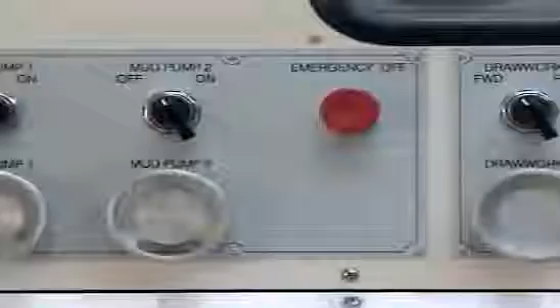As most of these problems can be simulated on the ADC Well Control Training Simulator, this movie is an effort to explain the possible complications, to recognize the indications, and take the appropriate actions in a timely and efficient manner. Welcome to the ADC Simulator, where we make the effort to simulate well control situations which occur on the rig as realistically as possible. In the following few minutes, you will see an enactment of a well control operation and the complications that might arise during this operation.

Hello, boss. Hello, driller. How are you? Fine, thank you. Hope you had a good rest. Yeah, I'm excellent, in good shape.

Very good. So today we'll be drilling. Okay. And while drilling, these are the parameters you have to keep. Weight on bit will be 25 to 30,000 pounds. RPM 120. SPM will be 70. So before you start, driller, make sure all your lineup is okay, on the rig floor and also on the choke manifold. Send your assistant driller and make sure the lineup is okay.

Check your alarms, and we are entering the pay zone now. So you have to be very careful. Make sure you set all your alarms. And if there is any drilling break, please make a flow check. And if it's flowing, then we will use the hard shut-in method. Sure, sure. Okay.

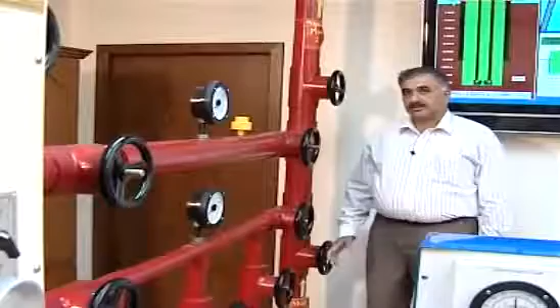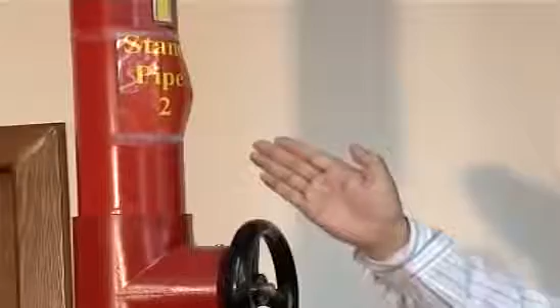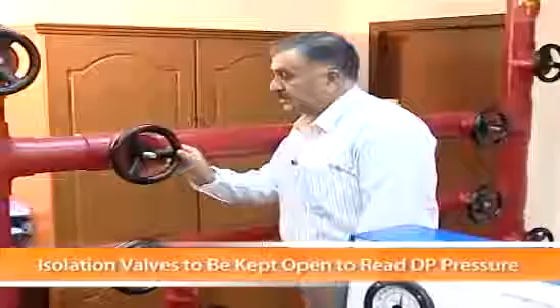I will check the standpipe manifold for correct lineup. Both mud pump number 2 and mud pump number 1 should be lined up. Standpipe number 1, the valve is in open position if the spindle is extended out, and if the valve is in closed position, spindle will be inside. The valve going to standpipe number 2 is in closed position. This isolation valve in the middle is in open position. Both of these valves are leading to standpipe number 1, which is also in open position.

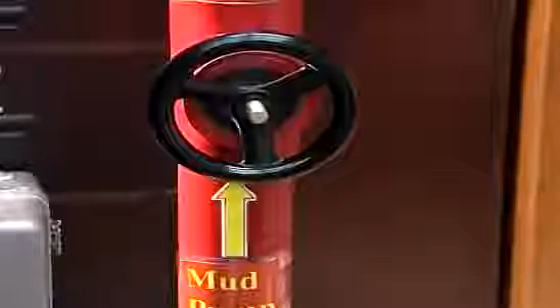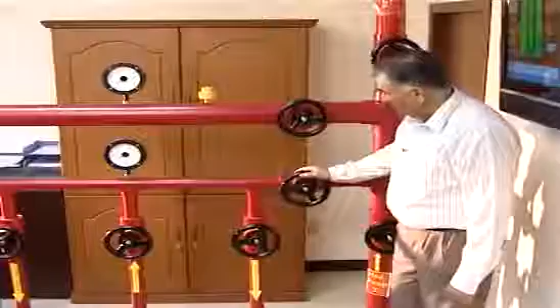The line coming out from mud pump number 1 is in open position. So both of the mud pumps, mud pump number 2 and mud pump number 1, are lined up to standpipe number 1. All valves on auxiliary lines should be in closed position. Closed, closed, closed, and closed.

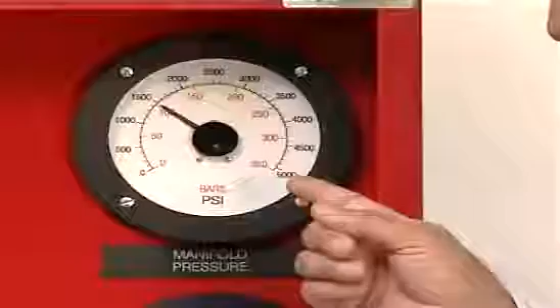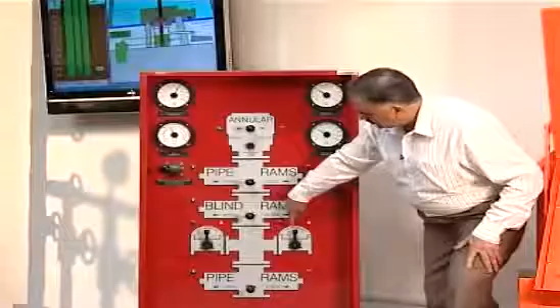Now I am checking BOP remote panel. Accumulator pressure 3000 psi, air pressure 120 psi, manifold pressure 1500 psi, annular pressure 1500 psi. Green light indicates that annular in open position. Green light upper pipe rams in open position. Green light blind rams in open position. Red light kill line in closed position. Red light choke line in closed position. Green light lower pipe rams, which are master pipe rams, are in open position. So all BOPs are in open position. Both kill line and choke line are in closed position.

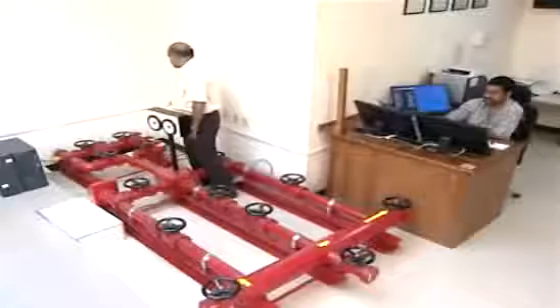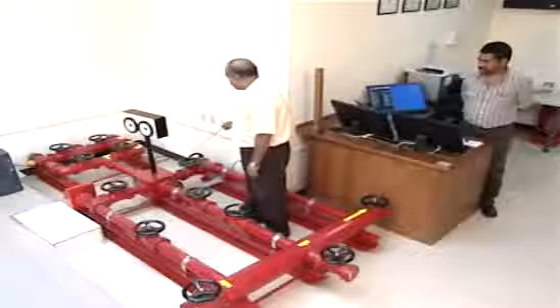As we will be using the hard shut-in method, this is the way we are going to line up the choke manifold. This is the line coming from the BOP and into the block of the choke manifold. From the block of the choke manifold, on this side we have the remote choke which will be in the closed position, and on this side we have the manual choke which is also in the closed position. The path the mud will take will be from the block through this open upstream valve, remote choke closed, valve downstream open, and out into the mud gas separator.

From the block there is also the bypass line with two valves on this line, both of which are in closed position, which is connected to the buffer line through which it goes to the flare line. This valve upstream of the manual choke is in closed position, the manual choke closed position, the valve downstream of the manual choke also in closed position, and this line also joins the buffer line. These are the gauges mounted on the choke manifold, one for drill pipe pressure and one for casing pressure.

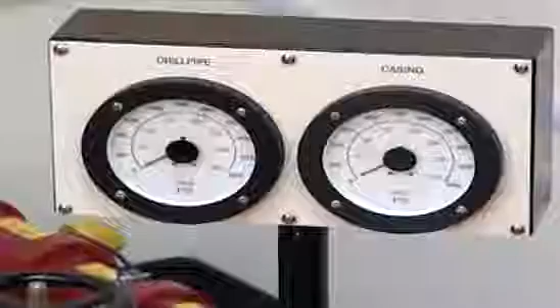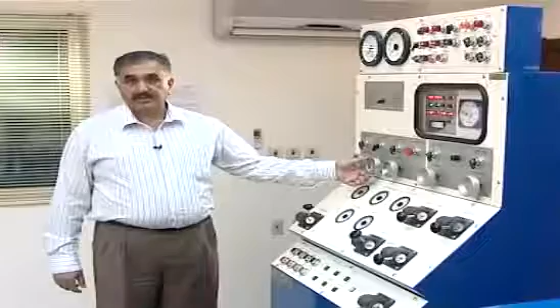To start the engines, press this button. To start the second engine, press this button. Put the mud pump 1 on, and before I go ahead to drill, I will take the slow circulation rate, bring the mud pump to 30 strokes, and I will read the pressure from remote choke panel. Slow circulation rate at 30 SPM, 650 psi.

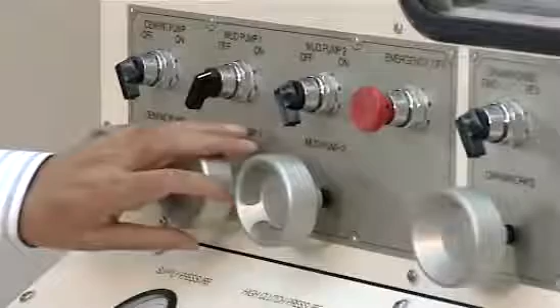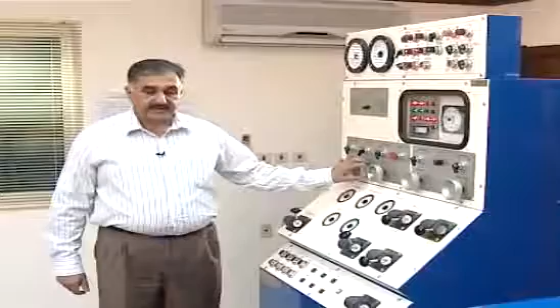I will bring the pump to 40 strokes. I will read the pressure from remote choke panel. Slow circulation rate at 40 SPM, 1150 psi. After taking the slow circulation rate, I will bring the pump speed to 70 SPM, and then I will set the alarms.

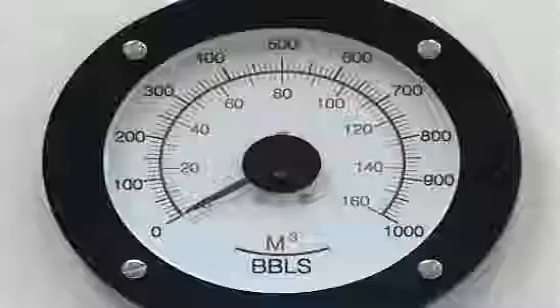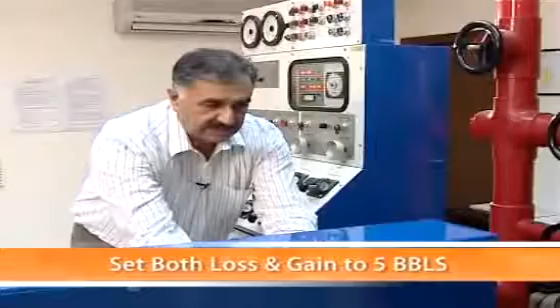Now I will set pit loss and gain alarm. I will switch on mud volume totalizers for the active system. Put the power on. Press this knob to the left and turn low adjust to the right until I see a red light. Similarly, press high set to the right and turn high adjust to the left until I see a red light.

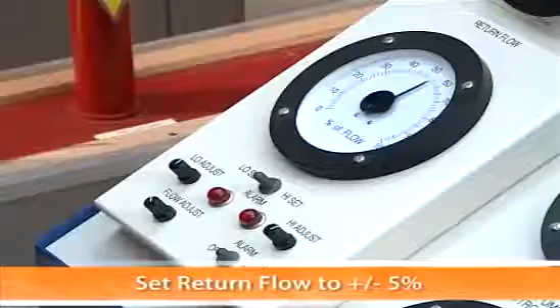Now I will set my flow line sensor for small increase or decrease in flow. So press this one to the left side and then rotate the low adjust until I hear an alarm. Then press to the right side and rotate high adjust until I hear an alarm. So now you leave it on. Make sure the alarm is in on position.

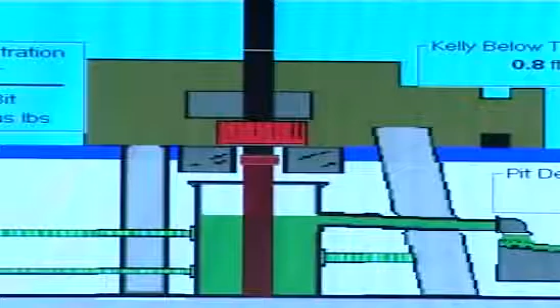I will lower the bit to bottom, and once the kelly drive bushings are sitting inside rotary table, then I will start the rotary. Okay, I'll continue to lower down until I tag bottom.

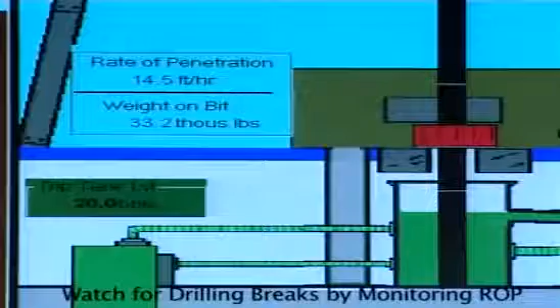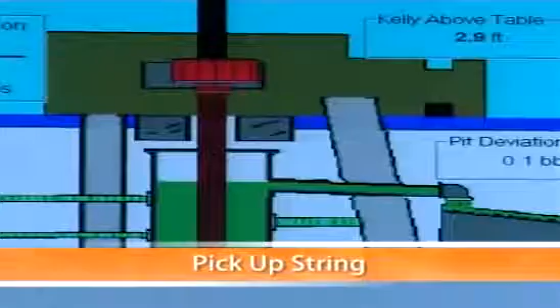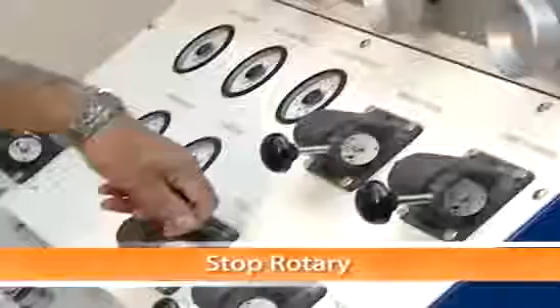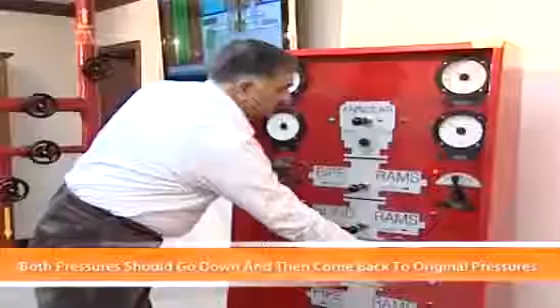I got a drilling break, stop the rotary, disengage the rotary clutch, and now I am picking up. Now I will shut the well in. And open the choke. Well is shut in.

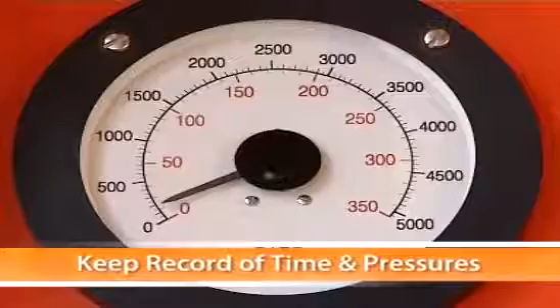Tool pusher, come on rig floor. I have a kick. Yes, driller, what happened? Well, I made a flow check on drilling break, and the well was flowing. So I shut it in with the upper pipe rams, and I've got shut-in drill pipe pressure 810 and shut-in casing pressure 900.

And what is the pit gain? 4 barrels. Okay, what is the MASP? 1600 psi. That's a very small kick. I think we can manage to kill it very easily. So I will do one thing. I will go just round, make a quick check and come back.

In the meantime, you keep monitoring the pressures to check for migration. Make sure that the pressure does not exceed the MASP. And anyway, if it is going more than 200 psi than what it is now, please call me. Okay.

Okay, the kill sheet is now ready. The MASP is going to be 1690 psi. We will be pumping at 30 SPM, and the strokes to displace the string volume is 2326.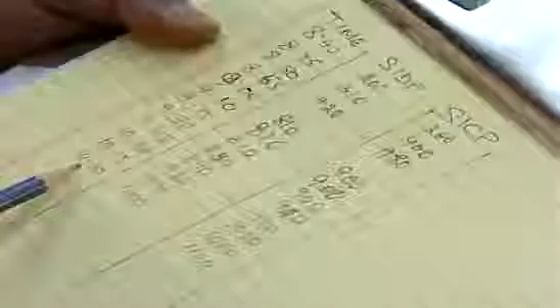The stabilized pressure at 9 o'clock was 810 psi on the drill pipe and 900 psi on the casing. It stayed like that till 9:15, and after that we are seeing some gas migration, and the pressure at this time at 10:30 is 1000 psi on the drill pipe and 1100 on the casing. That means there has been an increase of about 200 psi.

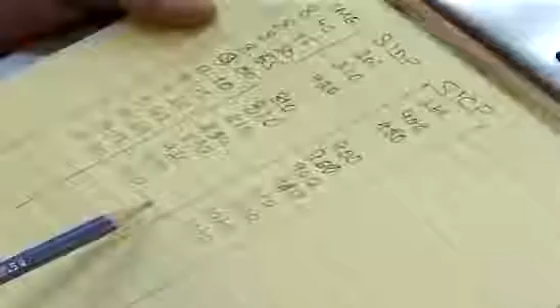As we have had an increase of 200 psi due to gas migration, the first thing that we will do now is to bleed off this excess 200 psi to restore the bottom hole pressure to its original value. To reduce the drill pipe pressure by 200, we have to be looking at the casing pressure gauge, because there is a time delay of 1 second for every 1000 feet of the well depth.

So now I am going to reduce the pressure on the casing side by about 100 psi, and then we will see a corresponding drop on the drill pipe gauge after a few seconds. The drill pipe pressure is now 850 psi. That is about 40 psi more than when we initially shut in the well. So we can now start killing the well.

Driller, the kill mud is ready, so have the derrick man line up the kill mud. We will be killing this well with 30 SPM using the wait and weight method. So I want you to increase the pump in stages, 5, 10, 15, all the way to 30 as I give you the signal. First of all, we will reset the stroke counter.

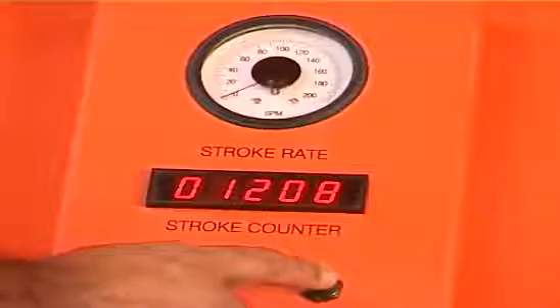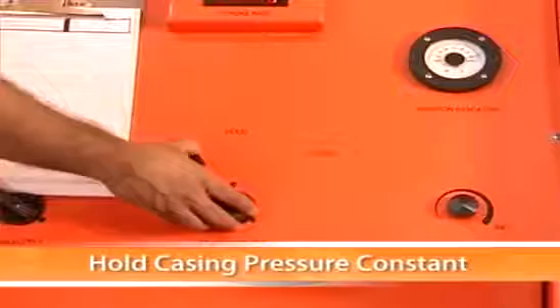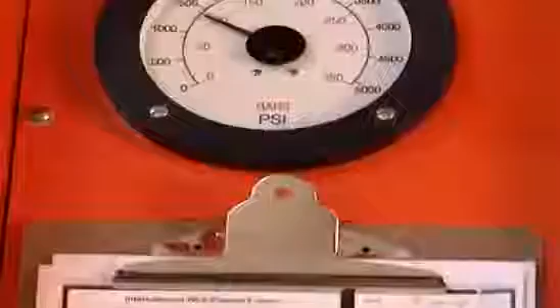Okay, driller, give me 5 strokes please. We will bring up the pump to the kill speed in stages, holding the casing pressure constant by opening the choke as necessary. Now that we have the pump rate up to kill rate speed, we will now follow the schedule as we have calculated in the kill sheet.

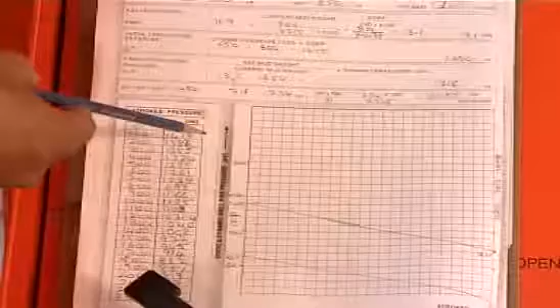We have now pumped 213 strokes. We have a pressure of about 1400 psi, and we need to keep, as per the schedule, 1380 psi, which means we are 20 psi overbalance, which means everything is going well. We have now pumped 904 strokes. The pressure is about 1200 psi. As per our graph, we should have 1160 psi. So we have now 40 psi overbalance, which means still everything is okay.

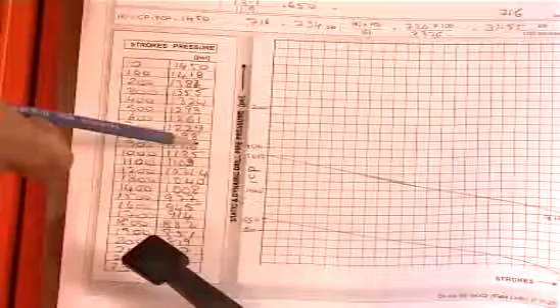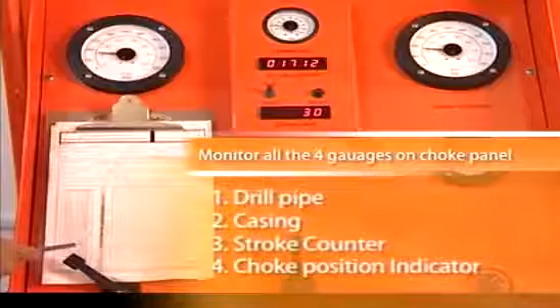We have pumped now about 1700 strokes. On the drill pipe side, we have about 950 psi. As per our schedule, we should be having 915. So we are still overbalanced by about 35 psi, which means everything is still okay. The casing pressure has been rising steadily as the gas expands as it comes up the hole. Since we have already pumped 2000 strokes, we do not worry about the MASP anymore because the influx is already inside the casing.

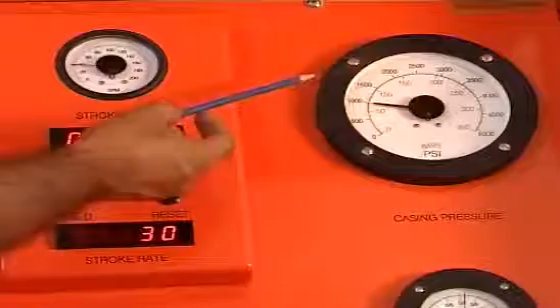We have now pumped 2367 strokes, which means we have displaced the drill string with the kill mud. We are now at the final circulating pressure, which according to our calculation should be 716, and the gauge is showing 750, which means we are 35 psi overbalance and everything is okay.

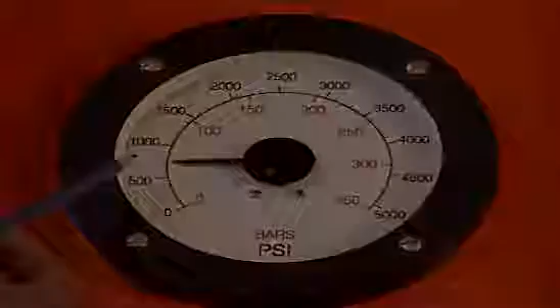We have now shut down the pump after pumping the string volume to check for pressures. The pressure on the drill pipe side is 0. That means the well is dead from the string side. Okay, driller, give me 5 strokes please. We will bring up the pump to the kill speed in stages, holding the casing pressure constant by opening the choke as necessary.

Oh, the pressure seems to be going up on the casing side. The casing pressure has climbed up from 1100 to about 1400. That's 300 psi more than normal. The drill pipe pressure also has climbed up by about 300 psi. Okay, driller, put the pump off. It's totally off.

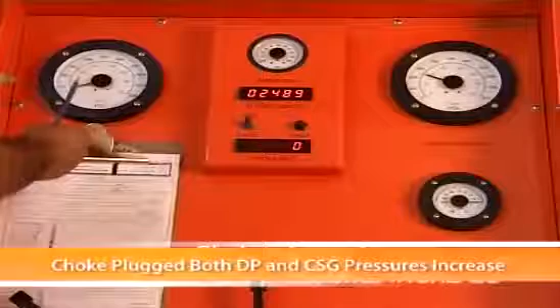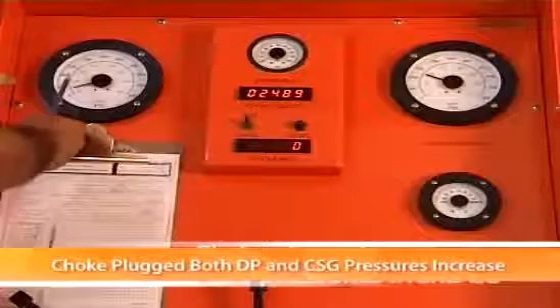We noticed that first the casing pressure started to go up, and after some time the drill pipe pressure also started to go up. Looks like we are having a plugged choke. So I asked the driller to shut down the pump immediately, and I closed the choke as well.

Now the drill pipe pressure should have been 0 because we have already pumped the kill mud down the drill string, but it is showing about 300 psi, which means this is some trapped pressure. So the next step would be to bleed off this trapped pressure and repair the choke or change the choke.

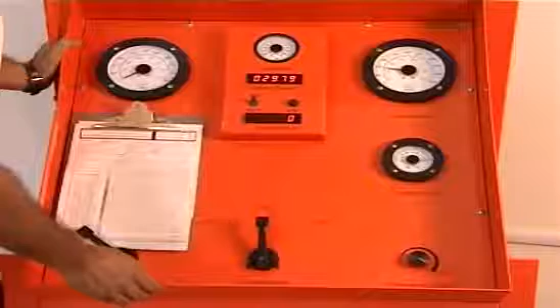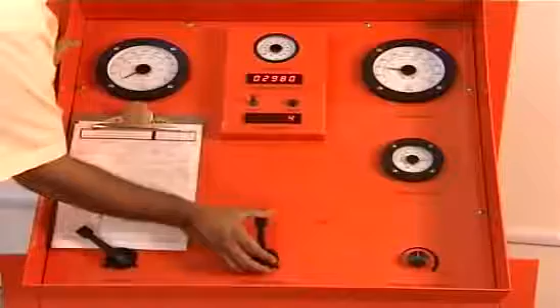We have just repaired the remote choke, and we are going to start the kill operation again. We will again come back to kill rate speed by holding the casing pressure constant. Driller, 5 strokes please. Ten please. Okay, we are back to the killing operation. Drill pipe pressure is now at 750. Casing pressure still at 1100. Everything seems to be okay.

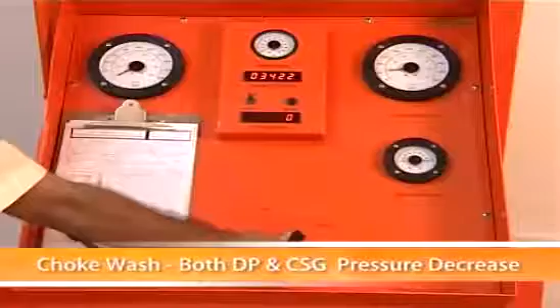Okay, I am seeing both the pressures coming down now. So I am closing the choke. In spite of my closing the choke, there is no reaction. Seems like there is a choke washout. Okay, driller, put off the pump. Since the choke is washed out, I have to close the HCR.

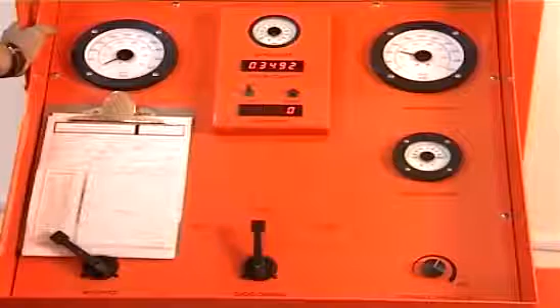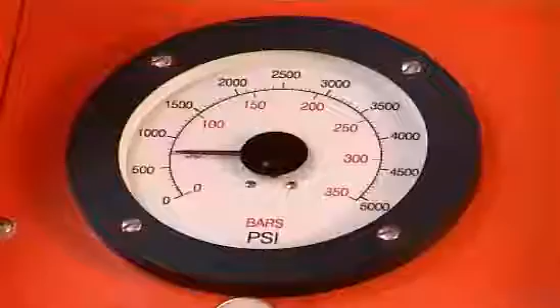Okay, we have repaired the remote choke now, and we're going to start the kill operation again. We will bring up this pump to speed holding the casing pressure constant. Driller, give me 5 strokes please. 15. We are back to kill pump rate, and the drill pipe pressure is showing 750 psi. Pressure is 750. Seems okay.

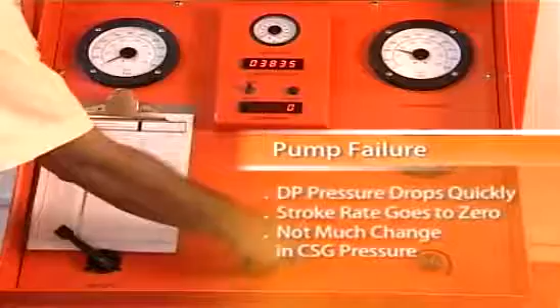Seems like the pump is down. Driller, the pump is off. Call the electrician and let's get it fixed again. Driller, since pump number 1 cannot be started, let's start with pump number 2.

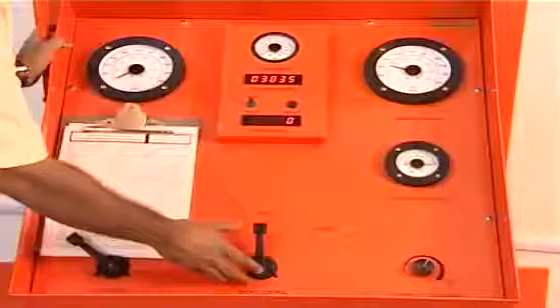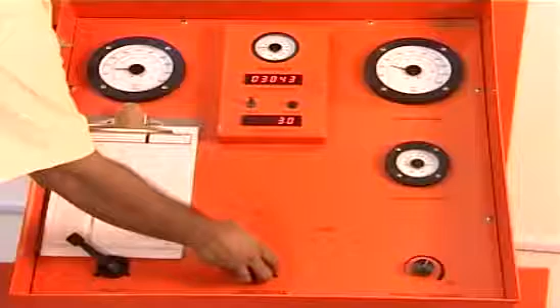We have lined up standpipe number 2 with pump number 2, and we are going to start the kill operation again. We will bring the pump up to speed holding casing pressure constant. Driller, give me 5 please. 15. 30. We have now pumped 3,900 strokes. We are still holding the FCP about 800. Casing pressure is showing about 1000 psi.

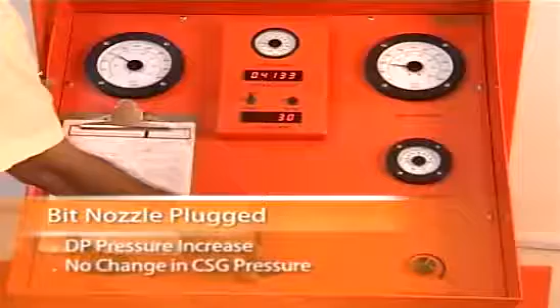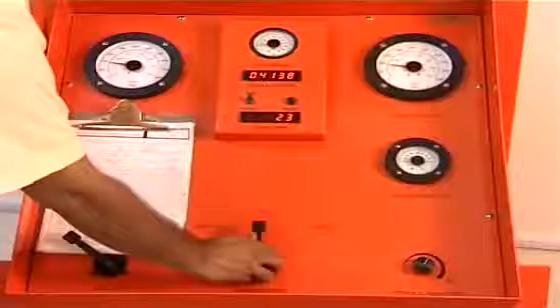The drill pipe pressure has shot up suddenly. There is no change in the casing pressure. Seems like the bit nozzle is plugged. Driller, let's shut down the operation. Reduce by 5 strokes. Shutting down the well keeping casing pressure constant. Okay, put it off completely, the pump.

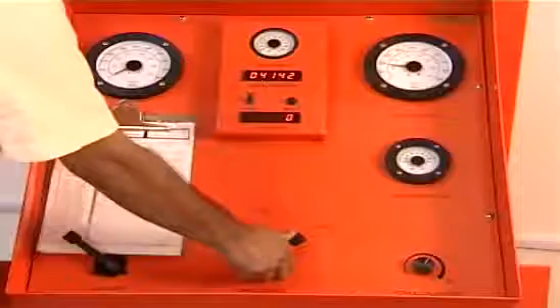Driller, looks like the bit nozzle was plugged. The drill pipe pressure went up, but there was no change in the casing pressure. So there's not much we can do now. Let's bring the pump back up to speed, holding casing pressure constant, and whatever we see on the drill pipe will be our final circulating pressure now.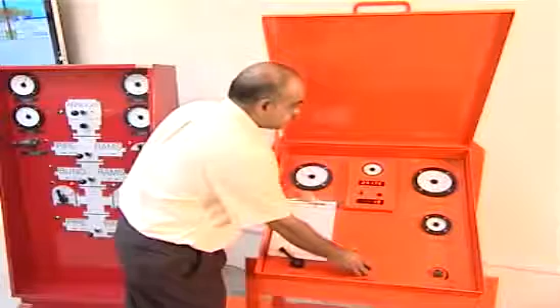Driller, give me 5 please. Give me 10. Give me 15. Give me 20. Give me 30. We are circulating at 1500 psi because of the plugged nozzle. The gas is also coming to surface. We can hear the sound of the gas.

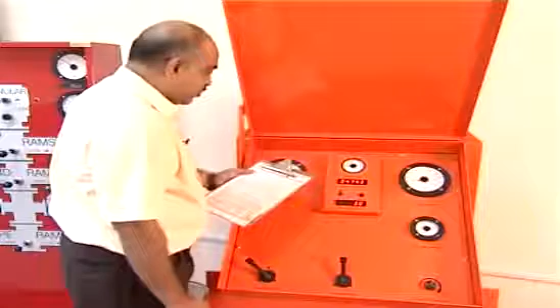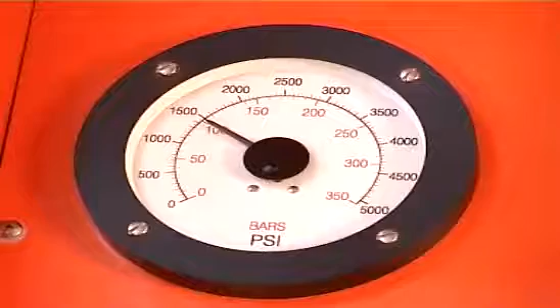The calculated bottoms up strokes was 4794 and we are now almost there with 4756. We can still hear the gas coming out, and as the gas comes out we can see the casing pressure has gone down. Drill pipe pressure is still at 1500 psi, so everything seems to be okay. The drill pipe pressure is still at 1500 psi and all the gas seems to be out. There is no more sound of gas coming.

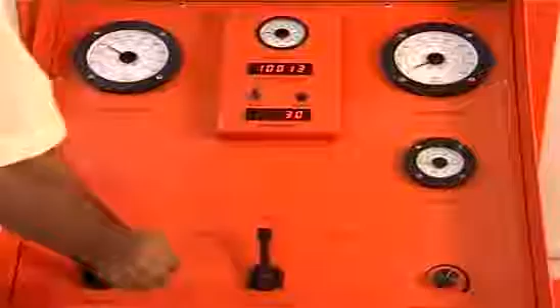We have pumped 10013 strokes. Casing pressure is almost zero. The choke is fully open. Drill pipe pressure is still 1500 psi. It is now time to shut down and check if there are any pressures left in the well. Driller, we will start to shut down the killing operation now. So please reduce the pump strokes 5 by 5.

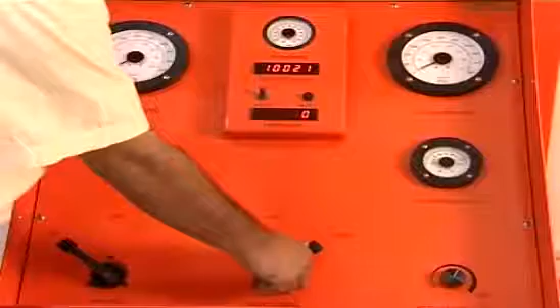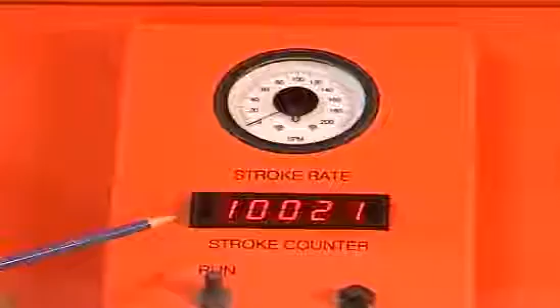Okay. Okay. Okay. Okay. Put the pump off, please. We have pumped about 10,000 strokes now. Drill pipe pressure is showing 0. Casing pressure is also showing 0. It looks like the well is dead.

We will now flow check through the choke manifold. The choke is now wide open and there is no more flow from the well. The well is dead. We will now open the BOPs and go back to drilling. Driller, great job. With all these complications, we managed to kill the well safely. Thank you very much.